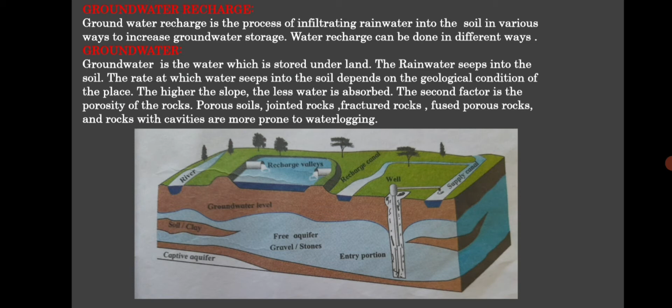We are surrounded by borewells and wells without water. The main reason for this is the lowered water level in the soil. This requires a collective effort to recharge the water. Where water is not available through the river or the canals, borewells are used. Now, agricultural water is also obtained through borewells.

Currently, the water level of this source is about 400 to 500 feet deep. Now, as the groundwater level is declining, it is becoming less day by day. Wells and borewells have to be there. It is a necessity to get them recharged. Now, groundwater is not being recharged in the proportion it is being pumped out. So, the groundwater level is getting deeper day by day.

In order to increase the groundwater level, it is necessary to try to infiltrate rainwater wherever possible. At the same time, it is also necessary to use the available groundwater very sparingly and scientifically. Groundwater reserves are getting depleted due to various reasons. As a result, they need to be recharged.

Now, many efforts are also being made to infiltrate rainwater by digging ditches and absorption pits in different places in the soil and at different distances in different layers of the soil. Various attempts are also being made to restore groundwater levels by storing as much groundwater as possible.

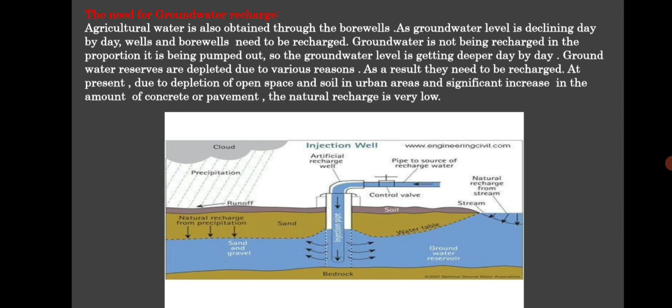So now let's see what care is to be taken while recharging the groundwater. Appropriate care should be taken when recharging groundwater or using groundwater. When infiltrating water in any place, it is important to filter the rainwater through a proper filtration system.

Rainwater may be acidic sometimes, or the roof surface may be unclean. Therefore, after the onset of the rains, recharge with the first one or two rainfalls should be avoided. We can purify polluted water on the ground, but if the groundwater source is contaminated, it is impossible to purify it.

Infiltration of water in the ground alone is not enough. When borewells are drilled, every borewell must be refilled. Due to the structure of the groundwater you have, if you do not refill, it can dry out suddenly at any time. So it is necessary to refill the groundwater in order to avoid the dryness.

Recharging groundwater and sources not only increases their water holding capacity, but it also adds a benefit for urban areas. If the rainwater is diverted to groundwater or sources, there will never be waterlogging or flooding in the area.

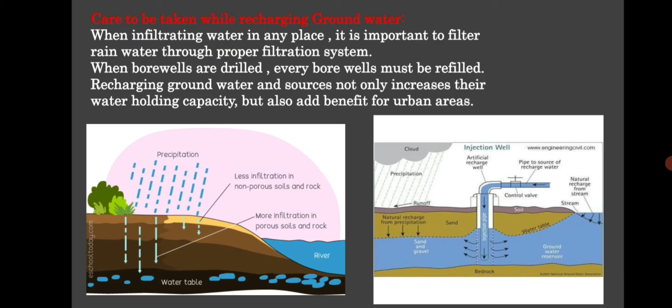Next, groundwater recharge and rain. Now, before you adopt any methods of groundwater recharge, you need to know the amount of rainfall in that particular area. The amount of water that can accumulate in the area can be calculated based on the amount of rainfall. So now let's see the mathematics behind the rainwater.

Now here we have taken an example. Suppose the area of the premises is 500 square meters and the area of the roof of that particular building is, say, 100 square meters. The total annual rainfall is given as 2.2 meters. So you have to find the total amount of water. The total amount of water is calculated by multiplying the area of the surrounding by the total rainfall.

So the total amount of water is calculated by the area of the surrounding. Now what is the area given to us? It is given to us as 500 square meters. So the area of that premises is 500 square meters. We have to find the total rainfall for that 500 square meters, which is equal to 500 multiplied by 2.2. That will give you 1100 cubic meters. So you can see that is 11 lakh liters.

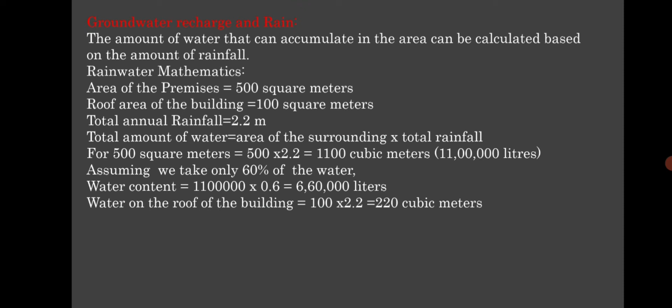Generally one person needs 10 liters of water every day. So if you think about the above mathematics, the water will be enough for about 50 people to drink for a year. The amount of rainfall varies according to the geographical conditions and the amount of water in each place will change accordingly. Now let's see the filtration system required for filtration of rainwater.

Now an important part of the rainwater filtration system is the suction pit. You can see the figure of the suction pit. It is also called an absorption pit. For recharge of water in sources like a well or borewell, the suction pit acts as a filter. If you want to recharge the source with your roof water, there are different filtration systems. First is the suction pit design. Now let's see how it has been used.

To absorb the water, a pit is dug at the place where the water is to be recharged. The size of the suction pit is decided on the basis of the component, that is, whether it is a well, bore well or roof water. So the size is dependent upon the component to be recharged. The proportion of elements in the suction pit, that is the stone and sand, is also taken according to the size of the pit.

At the bottom is a pipe of 3 or 4 inches in diameter, you can see, carrying the filtered water. The filtered water from this pipe goes to the wells, then to the bore wells and underground. The pit is divided into 3 or 4 sections with large stones at the bottom. You can see there are stones at the bottom, right?

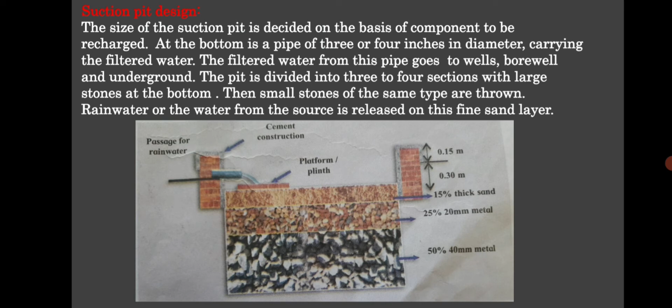Next, different types of filtration devices. Now we cannot use rainwater directly from the roof. Why? Because it is contaminated. If it has to be filtered, then what do we have to do? We have to prepare a filter. When preparing the filter, it should be according to the size and proportion of the components, and also the amount of water you need to be recharged. So according to the components in the filtration system, the following types are found.

First is the sand filter. Now we can see the figure of the sand filter. In a sand filter, a container of suitable size has layers of fine sand and gravel on top of each other. On one side there is a layer of porous material, then on top of that there is a layer of medium sized gravel. Then there is a layer of fine sand. The topmost layer is of gravel. The water to be recharged is released from this layer, and then the water is filtered out of the porous layer. So you can see in the figure.

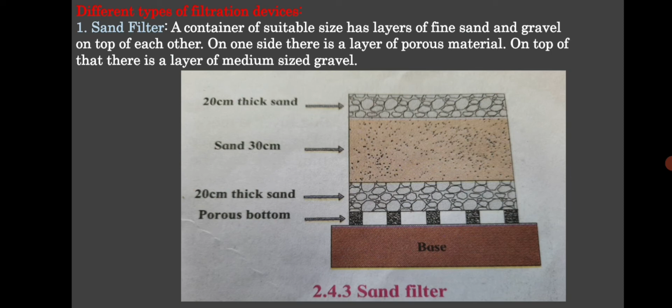The second is the coal filter. This is again similar in structure to the sand filter, but on the top there is a layer of fine coal. That is why it is named the coal filter. The recharge water is released from the top layer. The water is filtered and can be taken from the bottom layer for use.

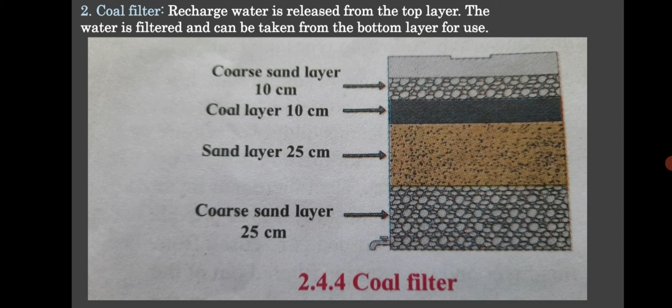Next is the filter in pipes. The filter in pipes is made in a plastic pipe. The pipe is approximately 140 millimeters in diameter and 1.2 meters in length. There are 3 layers of fine to large gravel. The first layer is made up of gravel of size 2 to 6 millimeters. The second layer is made of gravel of size 6 to 12 millimeters, and the third layer is of size 12 to 20 millimeters.

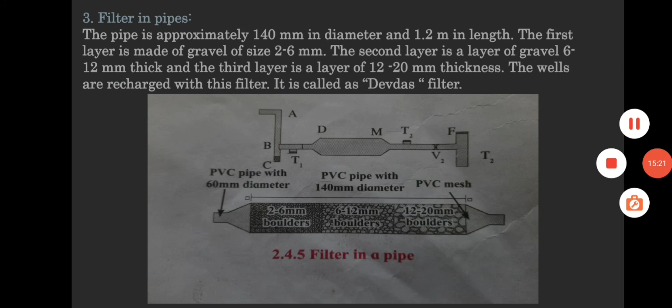The water to be recharged is released from the side with the fine gravel, and the filtered water recharges the water source as it flows out from the other side. The wells are recharged with this filter. This filter was constructed by Rural Engineering Services Dewas, in Madhya Pradesh.

Next, roof rainwater recharge. Rainwater is considered for both reuse and recharge. Rainwater harvesting is the process of recharging with rainwater. There are different types. In the first type, the rainwater is stored in a tank and is used for drinking and other purposes. In the second, rainwater is infiltrated into the soil through a suction pit. Such water becomes part of the groundwater.

The first one is storing rainwater in a tank. For the purpose of saving water and in places where drinking water is not available, rainwater falling on the roof can be stored in a closed tank for drinking and other purposes. After cleaning the roof with a couple of showers, the rainwater should be collected through a pipe, then filtered and stored in the tank. A special type of filter is used for this. Water should not be used without filtering. To treat this rainwater for drinking, a recommended amount of liquid chlorine or tablets are used.

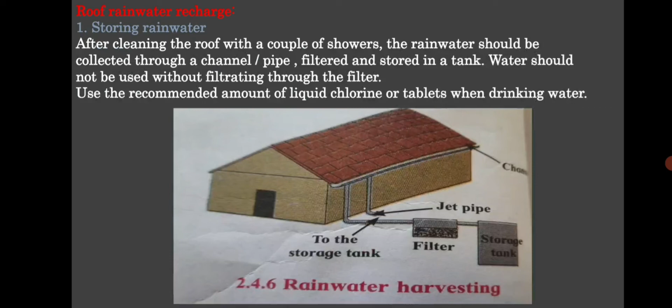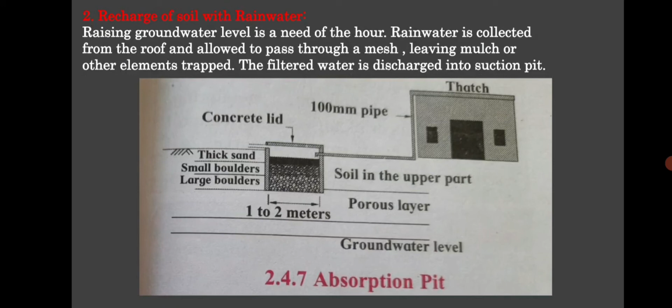Next is the recharge of soil with rainwater. Raising the groundwater level is the need of the hour. For this, recharge of rainwater is important. Rainwater is collected from the roof and allowed to pass through a mesh, leaving mulch or other elements trapped in it. This filtered water is discharged into the suction pit.

Next, recharge of borewell with rainwater. This type of refill is used for dry borewells in farms, villages or in the vicinity of large housing societies. To recharge a borewell in a field, the water of a runnel or stream is diverted as a source. The roof water is diverted to a suction pit to recharge the household or village borewell. A pit 2 meters wide and 2 meters deep, or a pit of suitable size, is dug around the borewell.

In the area of the casing pipe of the borewell, holes of specific diameters are drilled at a distance of 1 to 2 centimeters on all sides. Then coconut strings, also called katha, are wrapped tightly, or a plastic mesh is placed on these holes as a filter. So they act as a filter.

Now the pit is divided into 4 sections, filled with rocks at the bottom, then gravel above that, then coarse sand and fine sand at the top. So like this, there are 4 levels, or 4 sections. The water from the source is released at the top. You can see in the figure, the water is released from the top. Then the water goes down through the filtration process and becomes a part of the underground water.

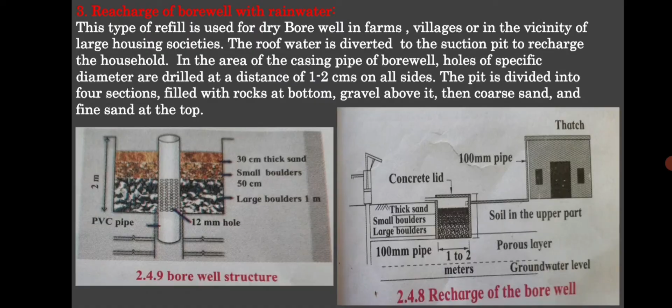Next, recharge of wells with rainwater. Here 2 separate pits of 3 meters and 2 meters length are dug between the well and the stream. The first pit is dug 3 meters long, 3 meters wide and 1 meter deep. The second pit is dug at a distance of around 3 meters from the first pit, so the distance is around 3 meters from each other. The second pit is dug 2 meters long, 1.5 meters wide and 2 meters deep.

Now there is a horizontal hole in the center of the first pit, and this pit is connected to the second pit by a 6-inch PVC pipe. The first pit is filled with stones. The bottom of the second pit is filled with a 0.45 meter thick layer of gravel. A 0.45 meter thick layer of sand is applied on that layer. Then it is filled with a 0.45 meter thick layer of fine sand, and a 0.15 meter thick layer of coal is spread on it. The pit is connected to the well by a 4-inch PVC pipe from the bottom.

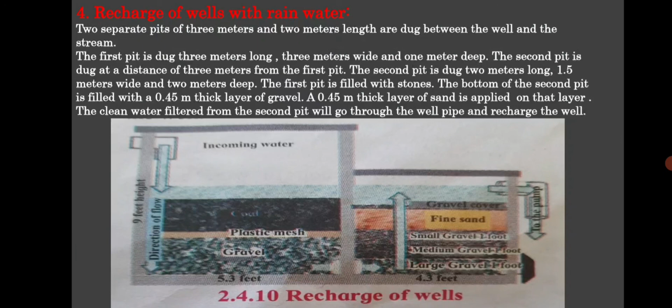The waste, the mulch, etc. from the river water will settle in the first pit, and the water without particles will go through the pipe to the second pit. Then the clean water filtered from the second pit will go through the well pipe and recharge the well. So this is the process for recharging a well with rainwater.

Next, precautions to be taken while filling wells and borewells. First, the water coming from the stream should be free of salt and other chemicals. Then water should be piped to the bottom of the well. Third, there should be 2 filter pits before refilling. Fourth, whatever dirt or impurities are there should be removed from the well before refilling it. Next, recharge should be done with filtered and clean water only.

Water on an area where salt has spilled, that is, where there is salt on the area, should not be used to recharge the wells. Then the last one, the filter made up of sand and gravel should be cleaned once before it is used, and it should be done before the rainy season. So with this we have finished the first terminal portion.

Now for your homework you have to do the exercise questions. All 5 questions have to be written into your notebook. For your first terminal, you don't have to study the question answers from the exercise, but you have to read the textbook thoroughly, because the questions will be asked from within the lesson. So read the textbook thoroughly, and the paper will be an MCQ type paper. So students, I repeat again, complete your notebook up to unit 2.